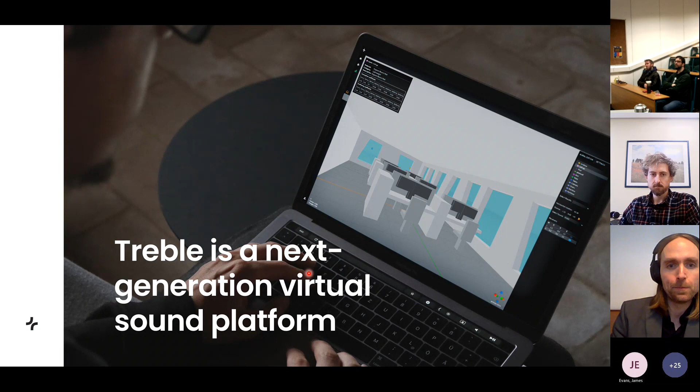When we started the company, we were very much thinking about the building industry. We wanted to build a simulation product that would enable architects and engineers in the building industry to better work with sound, to have sound be more integrated into the building design process by having a seamless software product that links into 3D modeling tools that people are using and can enable them to easily evaluate the acoustic quality of their design, listen to it as well, and do that in a precise manner as well with some of these new simulation technologies.

This certainly still remains a very important part of our target market, but we quickly realized as we got going that being able to simulate sound in a fast, efficient, precise manner in a modern software package has use cases beyond just building design. So we worked quite a lot in, I don't know if we call it the tech space or audio equipment space as well. Mostly thinking about simulating the interaction between some sort of device and the space it is placed in, and doing some optimizations of audio equipment with respect to that, or even the common use cases that people are simulating in bulk, simulating a lot of rooms, simulating devices in lots of different scenarios to generate data sets to be able to train some audio processing algorithms, some machine learning based processing algorithms based on these kind of high quality data sets.

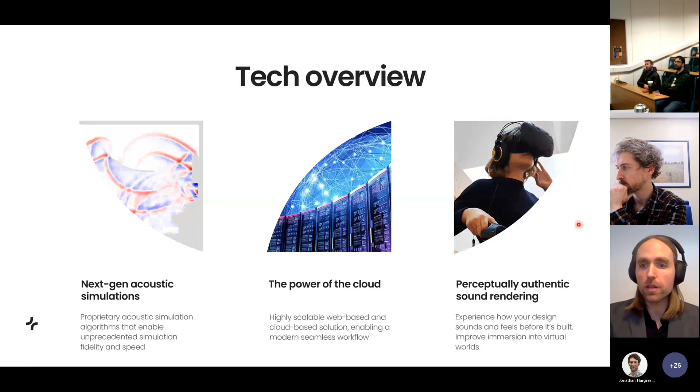Okay, and then last but not least, because we can simulate sound in a rather precise way, we can also generate perceptually authentic sound rendering experiences or listening experiences. And as mentioned before, try to couple the visual aspect and the audio aspect together and have it interactive in some way.

The current overview of this platform we are building looks something like this today. I will show you a demo of this later, as previously mentioned, of the beta version. The centerpiece of this platform is this web client, which is a user interface where people set up simulations. They can assign materials and sound sources and receivers and settings and things like that. This ships to the cloud, which does the number crunching itself, and then results come back here where people can both look at the graph of numbers and also do these immersive listening experiences in the model here.

And we then have this live link connection to a couple of well-known 3D modeling tools between the 3D model tool and this thing. So there's no import or export of files or things like that. This is what we currently have.

If we look a bit into the future for the roadmap for the next year or two, then there are a few things we are planning. We're building integrations into gaming engines, to enable coming in from that perspective and use the simulation technology to generate some listening experiences. We're also building an API product or an SDK product which allows people to work directly on a more programmatic level with the simulation technology. And then adding support for more 3D modeling tools. These are some of the things that we are planning to do, or are working on for the next year.

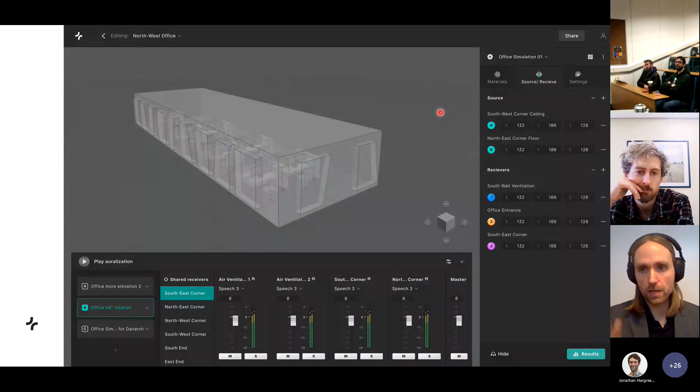Okay, this is a snapshot of the tool, but as mentioned, I will just open up the tool in a second and show you how it looks. So I'll skip ahead here.

That was kind of the broad overview of Treble as a company and about this product or platform that we are building. I hope it makes sense. But now we'll dive a bit deeper into the technology itself and some of the research that lies behind, and then show you some benchmarks and examples and things like that as well.

Okay, so our approach to simulating: primarily we've been thinking about room acoustics up until now. We have been doing some vibroacoustics and things like that, but that's more in a prototype stage at this point. Also environmental acoustic simulations, but primarily we're working with room acoustics, and also, as mentioned before, this interaction between device modeling and room acoustic modeling together.

And our approach to this is an approach which has been known for many years, and people have, especially in academia, done all kinds of implementations of this, where we have a wave simulation at lower frequencies and then geometrical acoustics at higher frequencies.

For smaller spaces, let's say meeting rooms, residential areas, things like that, we can use wave-based only for the full spectrum. But when we go to larger spaces like auditoriums or concert halls and so on, then this becomes quite heavy to cover the full spectrum, and therefore we combine these two approaches.

Wave-based methods have the benefit of being very accurate. There we are solving the differential equations that describe wave motion, but the drawback is that as frequency grows, the compute time grows quite a bit. Geometrical acoustics, on the other hand, is a rather fair approximation at high frequencies. It is essentially a high frequency approximation, but the accuracy can suffer, particularly in cases where wave phenomena are prominent, which happens more at the lower frequencies.

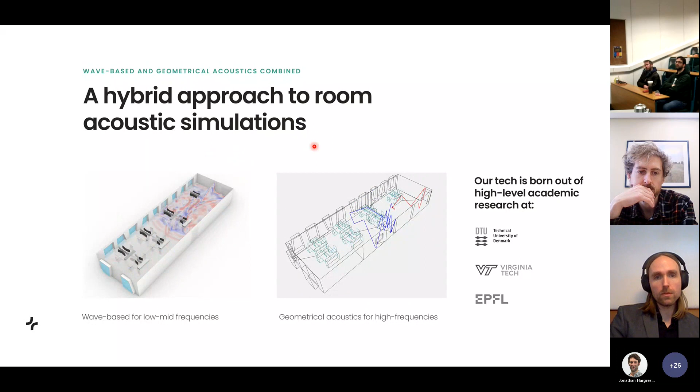The numerical method that we rely on is called the discontinuous Galerkin finite element method. This is a flavor of a finite element method that has certain attributes which are attractive for acoustic simulations. First of all, like boundary element methods and regular finite element methods, it has a high level of geometric flexibility because it can work with unstructured meshes, so we can rather precisely simulate complex geometries. But combining that with the method's high parallel efficiency is what makes it so attractive. So we can do complex geometries, and it's very efficient to parallelize.

Finite difference time domain methods, which some of you might be familiar with, have a very high parallel efficiency, but they don't have this level of geometric flexibility. So this method has the best of both worlds in some sense. Of course, there are many different numerical methods out there, and they all have their pros and cons, and I'm not necessarily saying that this is the holy grail or best method for everything. It's going to be problem dependent, but we at least like this one quite a bit.

Then in addition to these two main factors, it's easy to extend this method to high order accuracy, which, long story short, means that we can do more efficient simulations. We can rely on higher order basis functions when we represent our solution in this computational mesh. And it has a lower memory footprint than traditional finite element methods, considerably lower.

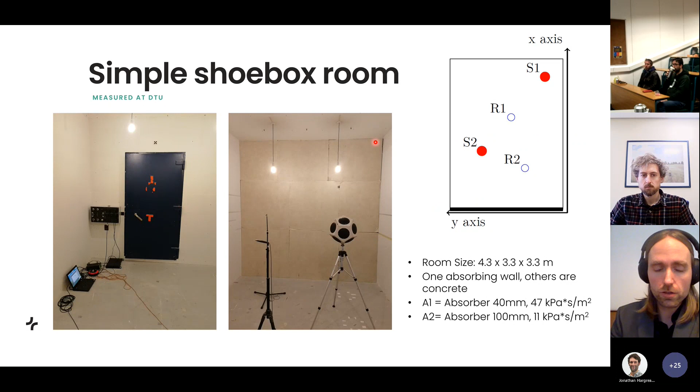Here again, we're still just considering the wave solver, focusing on low frequency behavior. And for this rather controlled scenario, we see that for both these absorber types, for randomly selected source and receiver positions, the measurement and the simulation align really well.

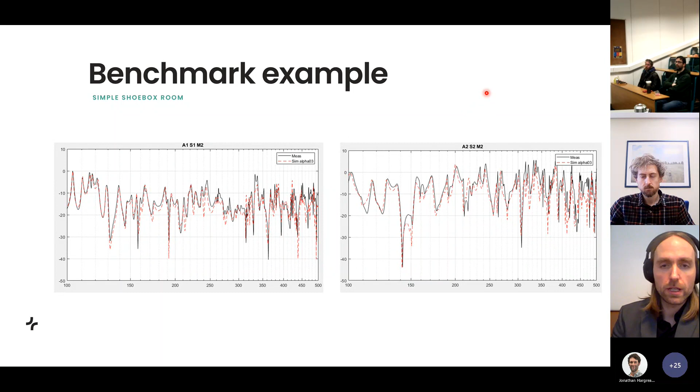Discrepancies here at high frequencies might be explained by the fact that the measurement is done with a directional sound source, but we actually did this test case with an omni sound source, so we need to update our simulations in this case.

And how are we doing on time? Okay, it's okay.

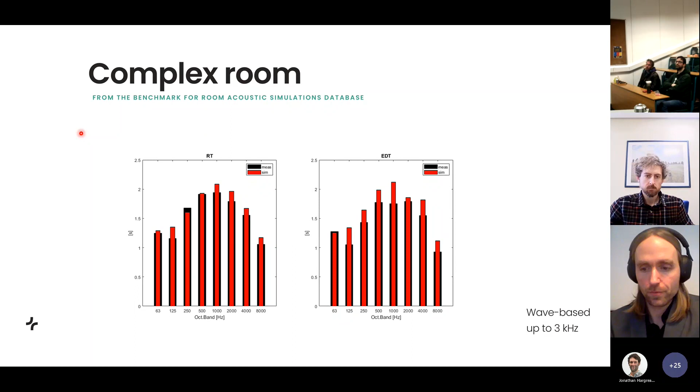Okay, a few comments about the computational performance. For this particular room we just saw, which is around 150 cubic meters, the runtime will vary depending on how high in frequency we go with the wave solver. There's no way around that. It grows with frequency to the power of 4. That's just something that we have to live with.

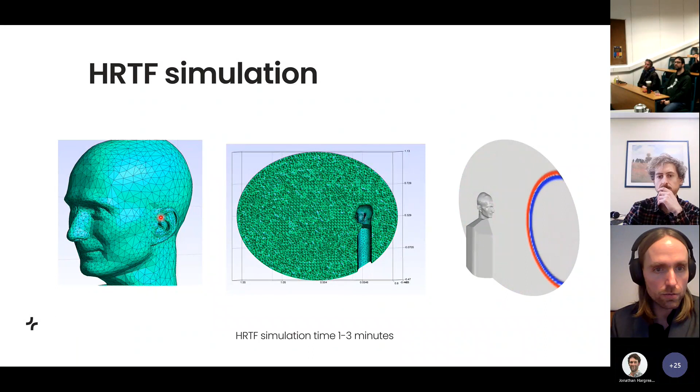This is a quick demo where we used the solver to simulate an HRTF. I think this is mostly illustrating that, with these unstructured mesh methods, we can capture these kind of detailed geometric features like the pinna shape of the ear and model this rather precisely.

Okay, this is the last benchmark here I want to show you. This is maybe most recent work from some of my colleagues. So here we're trying to capture the sound field in a wave-based simulation with high precision of the spatial characteristics of the sound field. So we can, for example, generate very accurate binaural room impulse responses.

In smaller rooms, we can do fully wave-based simulations without problems, and then, as I said, either do these accurate binaural renderings or do some sort of detailed analysis of the spatial characteristics of the sound field.

And so we've built up this whole tool chain of capturing the sound field with lots of microphones, like a virtual microphone array, encoding that to high order ambisonics, something like 16th order ambisonics, and then decoding that back to a binaural signal or device related signal. And just to validate this chain, let me show you an example here.

Okay. That was it for the presentation. I see time is flying. We'll do 2 minutes of demo of the product, of the beta version, and then let's do questions. So here it's a web-based tool. I come into the tool just by going to a particular website. The projects I've been working on are here. I'm just going to quickly open one since time is flying.

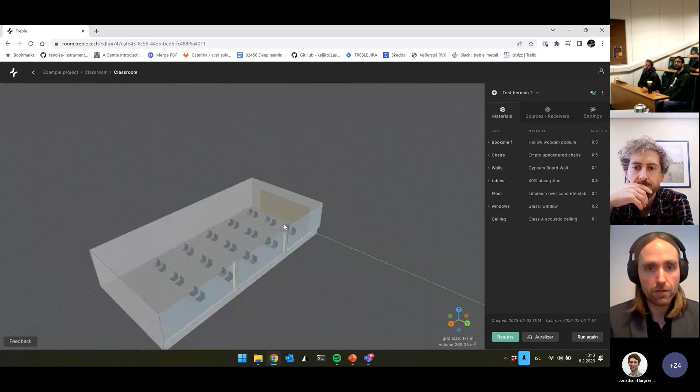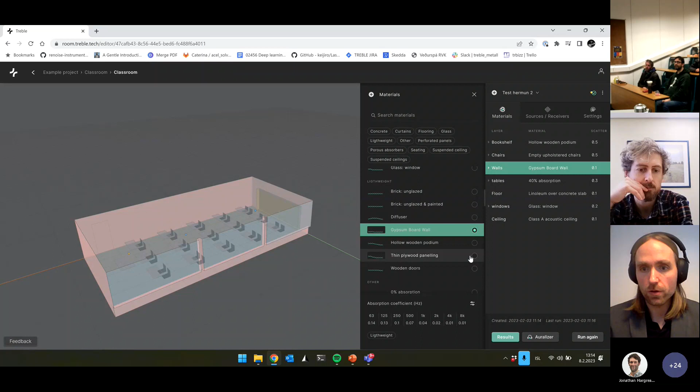So in here, I have my 3D model, which is live linked to my SketchUp model. I can assign different acoustic materials on different surfaces that I've categorized into different layers when I prepared my 3D model. I can look at details about the materials like the absorption coefficient and the complex reflection coefficient, which is used when modeling the surface. Add my own materials, etc.

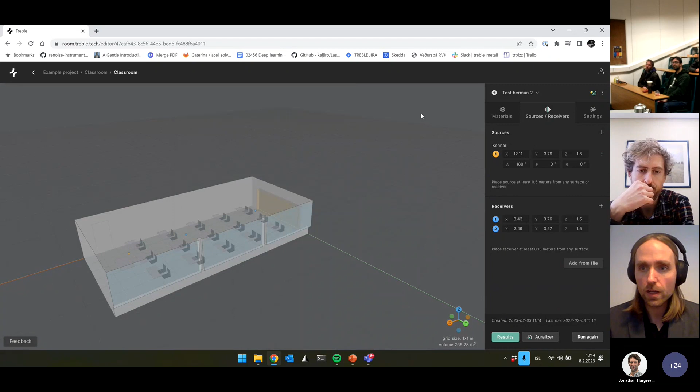I can place sound sources and receivers, both directional and omnidirectional sound sources, and some settings, for example, how high in frequency I want to go with the wave solver before I switch over to the geometrical acoustic solvers. And I ran a couple of simulations here beforehand. One thing which we think is pretty cool is that you can run as many simulations as you want in parallel, and once you send off a simulation, you can immediately start preparing the next simulation. You don't have to wait for the other one to be finished or anything like that.

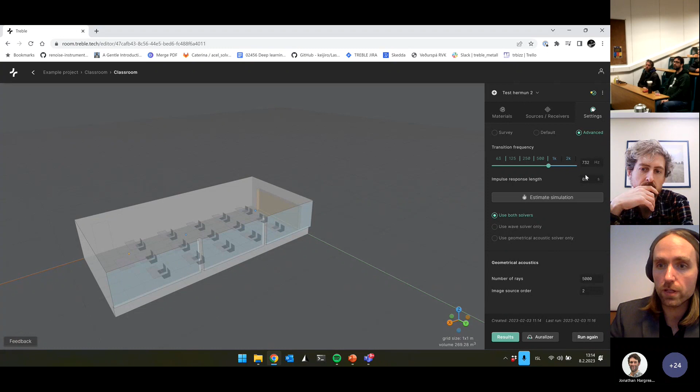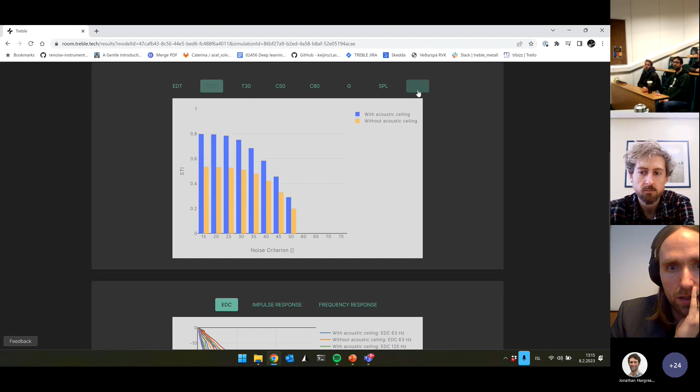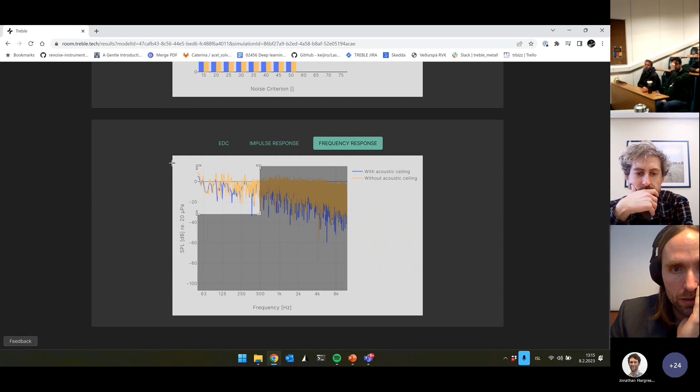But because time is limited, before this, I ran a couple of simulations of this classroom, one where the ceiling was hard, like a gypsum ceiling, and one where there was an absorbing ceiling. And we can quickly look at the results. We can compare different results of simulations here, and the reverb time is obviously longer without acoustic ceiling, and with acoustic ceiling, something like this. Obviously the reverb time gets shorter when we add an acoustic ceiling, and things like speech intelligibility will increase. And I can look at charts, impulse responses, frequency responses, and things like this in my analysis.

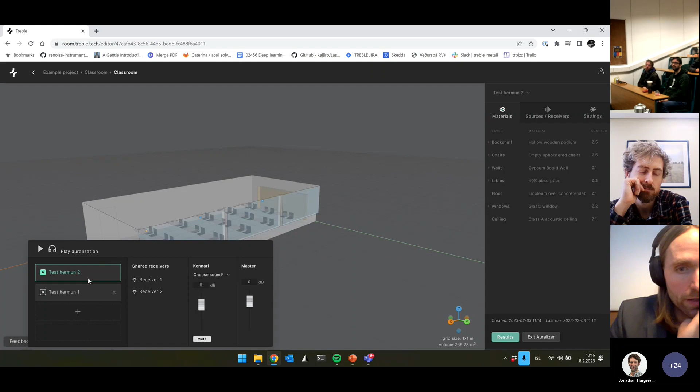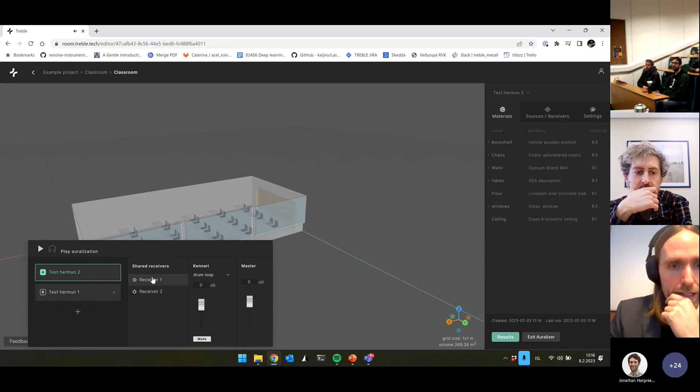I can also listen to the results here in what we call the auralizer. So here I can pull in different simulations that I have run. These two have different materials, and then I can pick a sound for my sources. I can have many sound sources and mix this in real time. But here I'll just play something. This is an anechoic sound you'll hear first. Hope you're hearing some kind of drum machine playing. And then I can jump into the domain, move around, compare the simulations on the fly, and experience the difference.

Birch canoe slid on smooth planks. Glue the sheet to the dark blue background. A large size in stockings is hard to sell.

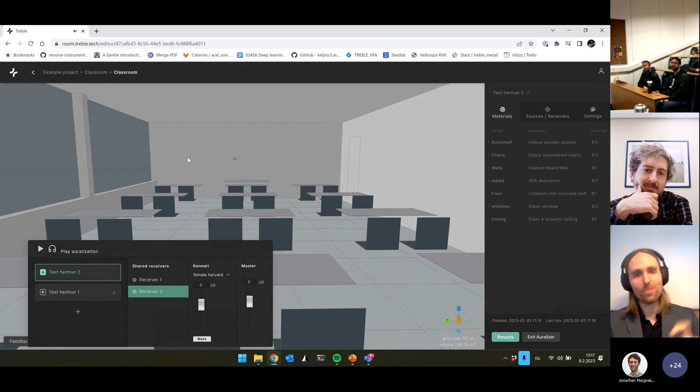All right, so that's a 2-minute demo of the beta version. There are many cool things I didn't get the chance to show you, but it's in a nutshell what it looks like. I think I'll stop talking now so there's some time for questions.